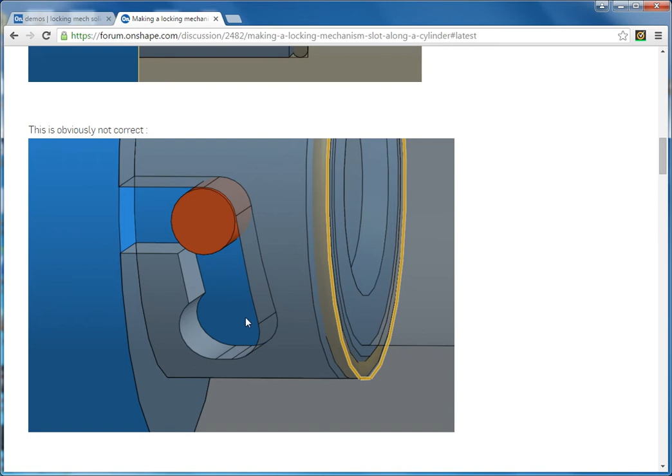Hello, I'm making this video today because someone on the Onshape forum was trying to model this locking mechanism for the breech of an air cannon, where this pin would slide and then rotate and lock in. And to create this slot to model it properly is actually a little bit more tricky than it appears. As you can see, he tried to do this with a straight extrude and it's not quite right, so he was looking for some tips. So I'm going to show you how I did it myself.

And this is the finished result. If you look at it carefully, you can see that the faces are all tangent and smooth. The slot is a uniform width all the way through. You can pass a cylinder down the one slot, around the helix, and into the other one smoothly without any interference. What you're really simulating is the movement of an end mill through the solid, cutting away as if you passed a cylinder through this path.

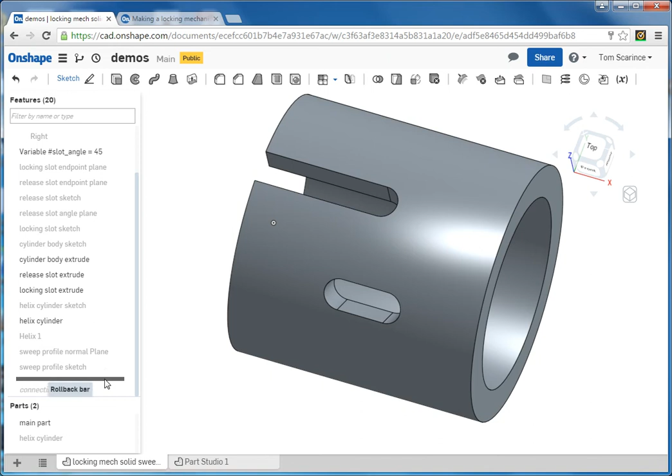So the trick to doing that, I'm going to back up a little bit here, is to fairly straightforwardly model the two slots and then create a helical sweep between the endpoints. And there's a certain way you have to do that to get the surfaces to meet up properly. Let's see here. What we need is a helix between the center points of those two rounded ends of the slots.

So I did that by creating a cylinder, because with Onshape you create a helix by selecting a cylindrical surface. And the cylinder starts at one endpoint and stops at the other endpoint, right at the center. Now it's a little bit tricky when you create this helix to define it. The start position or start orientation is not really definable. There's no way to define the 0-degree reference for this, so you kind of have to monkey around with it.

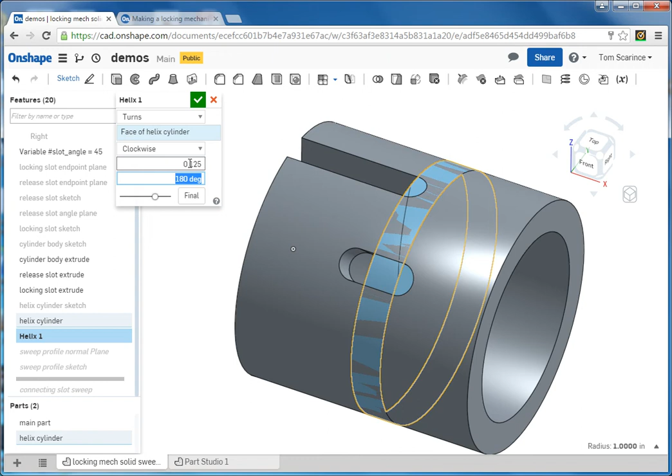I ended up having 80 degrees or 180 degrees getting us to this point right here. So I adjusted it a little bit. You can see it's going to turn on me. So I want that there. And that was just mostly trial and error. The number of turns, since I have 45 degrees between these two slots around the axis of the cylinder, I made this an eighth of a turn, which is equivalent to 45 degrees. So that got me my helical segment here. I'm going to turn off that cylinder just so we can see a little better.

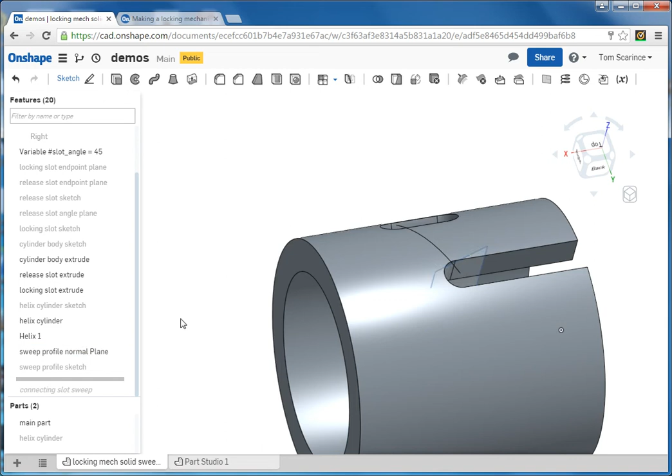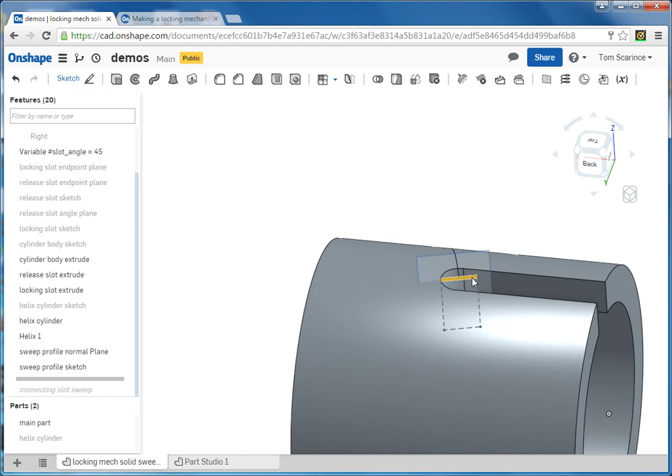Now once I have this path, very important is to create a plane for your profile sketch that is at the endpoint and normal to the helix at that point, and right through the center of that circular endpoint. And then it's just a matter of creating a rectangular sketch. Once again, as you can see, it is centered on the path. This is constrained right to the midpoint. It's tangent to the circle. It's the same width as these slots. Once again, it's on that plane that's normal to the helix.

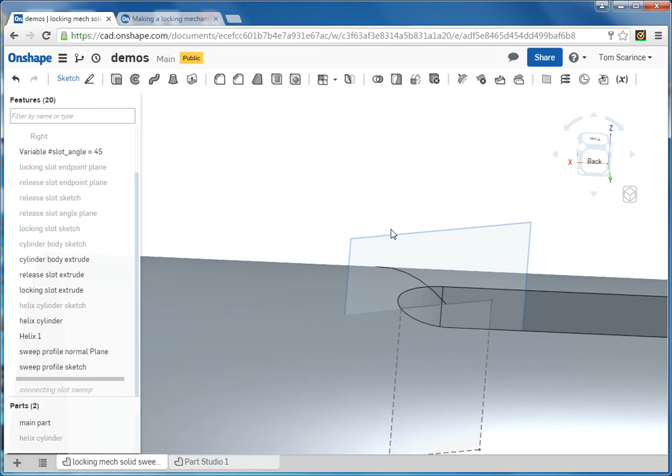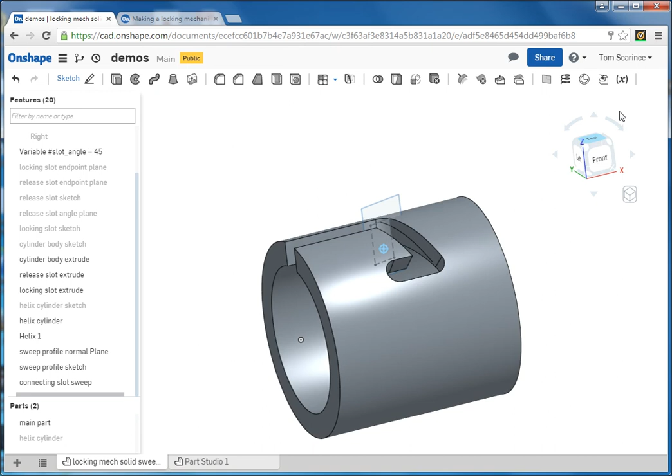And then it's just a matter of creating a sweep of that profile along that path. And that gets our cutout. As you can see, since it's at the proper angle here and it's already tangent, it will start out tangent and smoothly sweep along. And since the endpoint is also positioned correctly, it will join that slot smoothly. And as you can see, if you can imagine the cross section of a cylinder that you just passed along this path, cutting away, you can see that it makes the proper geometry.

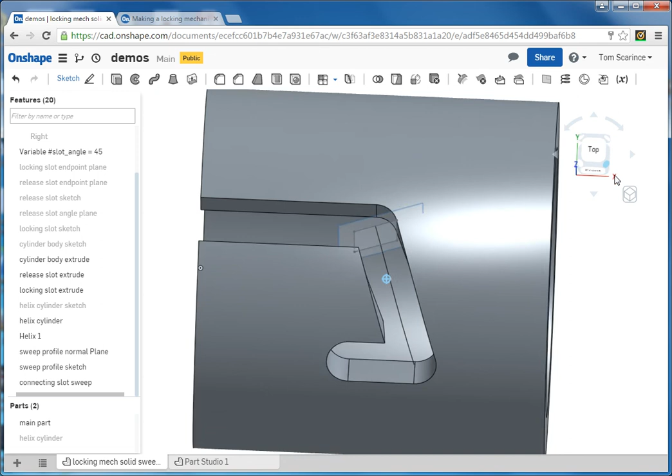If we had created a sketch in a plane that was parallel to the axis here, you could see that the slot would be not as wide as it needed to be, and it wouldn't meet up tangent properly here. So that's how I did it.